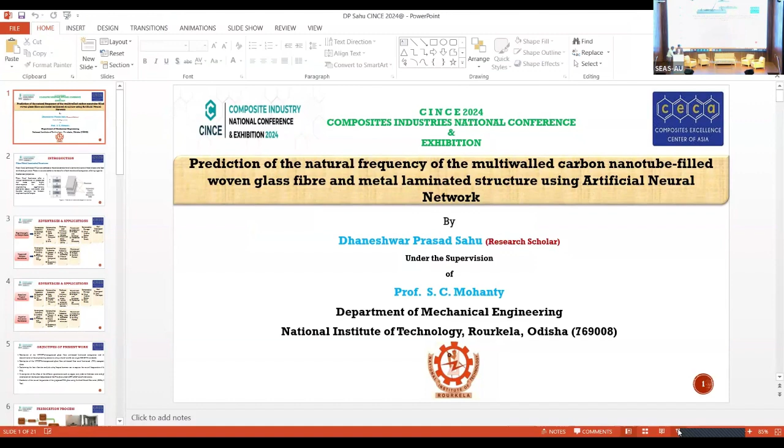Good afternoon to all. First, I thank Professor R.K. Singh sir for giving me the opportunity to deliver my talk on the topic of prediction of natural frequency of multi-walled carbon nanotube-filled woven glass fiber and aluminum-based fiber metal laminated structure using artificial neural network.

Over the last 2 days we have seen many lectures dedicated to either purely fiber-based composite or metal matrix composite. So in this talk, I just cover what happens if we combine the fiber and the metal, and what are the advantages. As a mechanical engineer, we are aware that

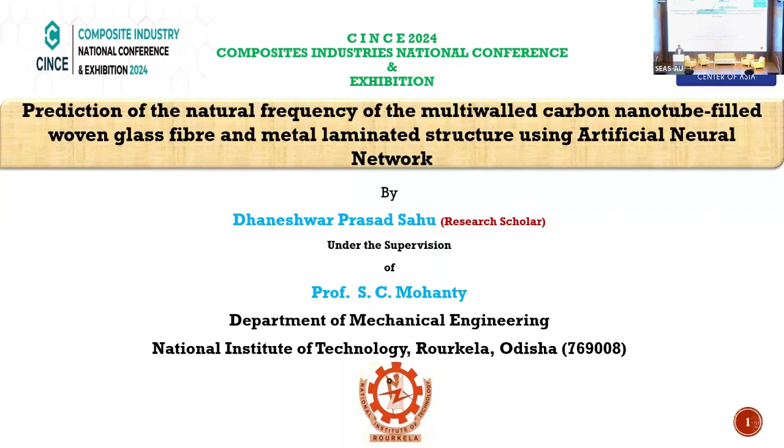vibration is a big enemy for us in structure application. So using fiber metal laminated structure, somehow we minimize the vibration in structure for aerospace application. Fiber metal laminated structure consists of glass fiber and aluminum, arranged in a sequence shown in figure 1: first aluminum layer, then glass fiber, then again aluminum, then aluminum layer, then glass fiber, then again aluminum.

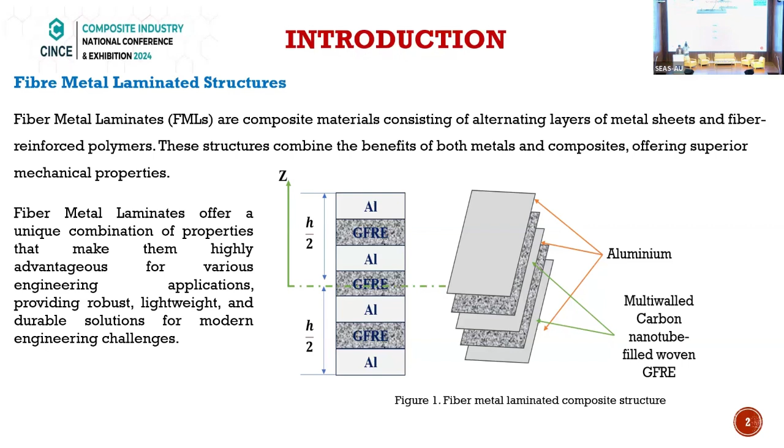These properties are generally used in aerospace, automotive industry, defense and military, construction industry, renewable energy, and rail and transport. Then second property like improved fatigue resistance, these are used as mentioned, and excellent impact resistance, superior corrosion resistance as it is combined with glass fiber, so we can minimize the corrosion.

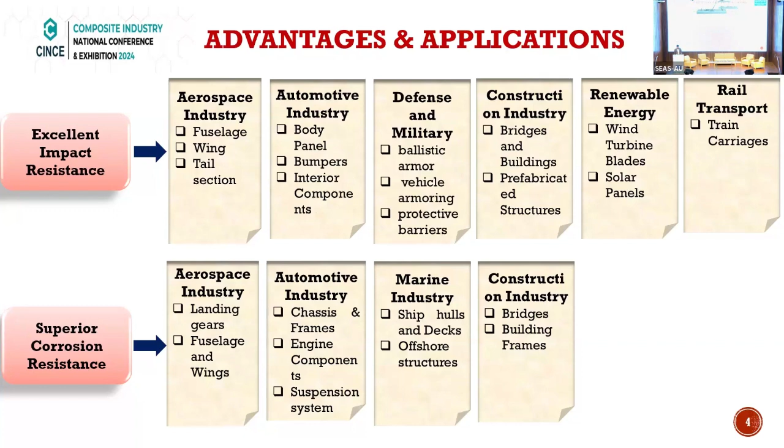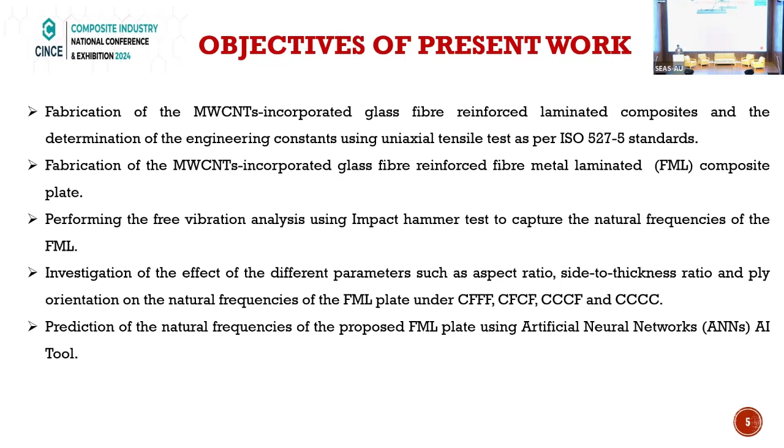The objective of the present work is: first we prepare the multi-walled carbon nanotube-filled glass fiber through hand layup technique. Then we prepare fiber metal laminated structure. Then we perform free vibration analysis using impact modal hammer test to capture their natural frequencies. Then subsequently we study the effect of various parameters like aspect ratio, side to thickness ratio, and fiber angle in laminate sequence of glass fiber, on how these parameters affect the natural frequency. Finally I propose a prediction model to predict the natural frequency using artificial neural network.

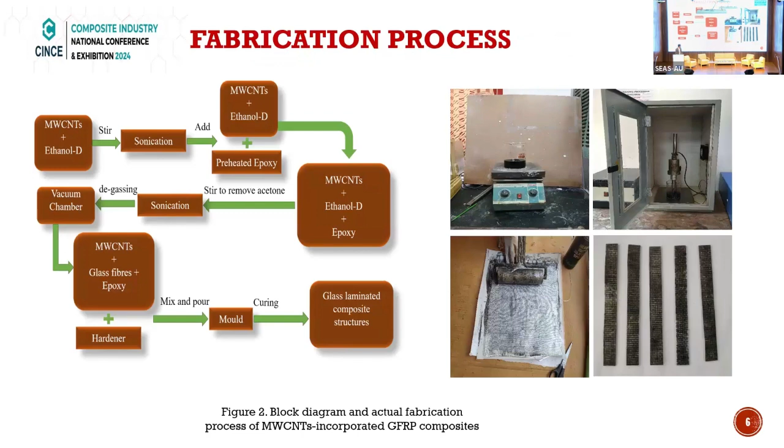These are the fabrication process as shown in figure 2. Left side shows the block diagram, and the right side shows the actual fabrication process. The engineering constants of both aluminum sheet and glass fiber are calculated through uniaxial tensile test, adopting the ASTM ISO standard.

As we know, bidirectional woven fiber has similar elastic constants in both directions, either transverse or longitudinal. To get accurate results and minimize error, I tested 5 samples in the length direction and the 45-degree direction. The 45-degree fiber direction elastic property is required to calculate the shear modulus, which is calculated through Jones formula, as mentioned in Robert M. Jones' Mechanics of Composite Materials book.

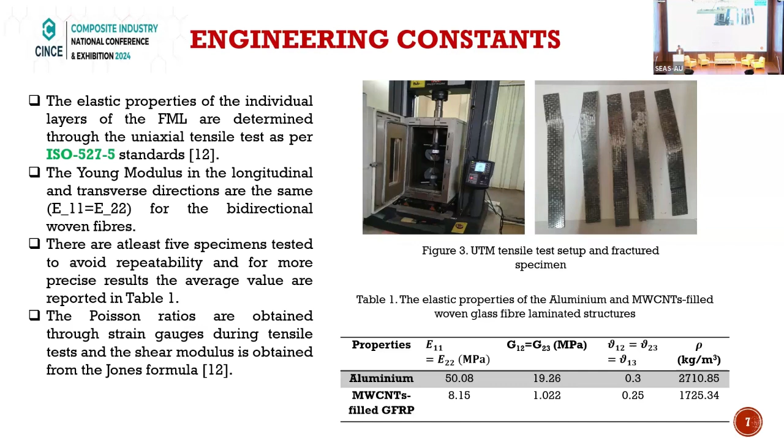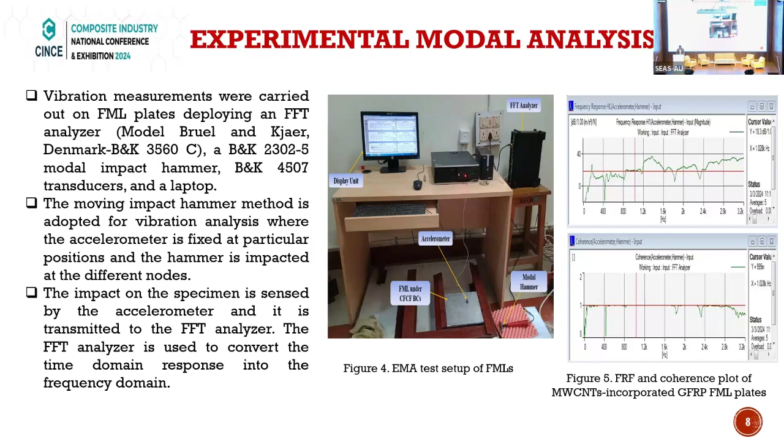We also simulate the natural frequency in Abaqus software. First we create a geometry, then dimension the geometry, then we lay up the geometry and assemble. Then we assign the mesh size, finalized through convergence study and validation study, and then we assign different boundary conditions.

For the present analysis, I have adopted 4 types of boundary conditions: cantilever boundary condition, opposite side fixed and opposite side free boundary condition, 3 side clamped and 1 side free, and all side clamped boundary condition.

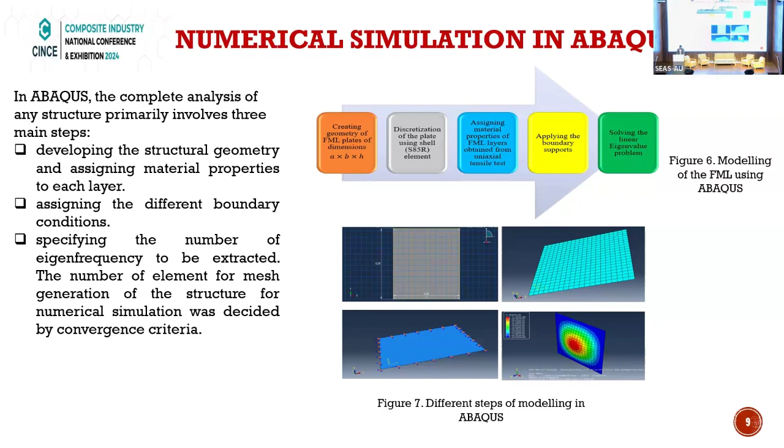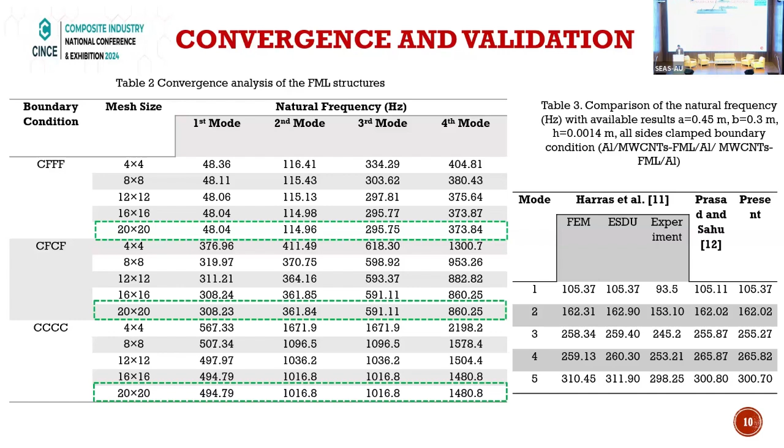Then I performed the parametric study through finite element software. First I investigate the effect of aspect ratio, how aspect ratio affects the natural frequency.

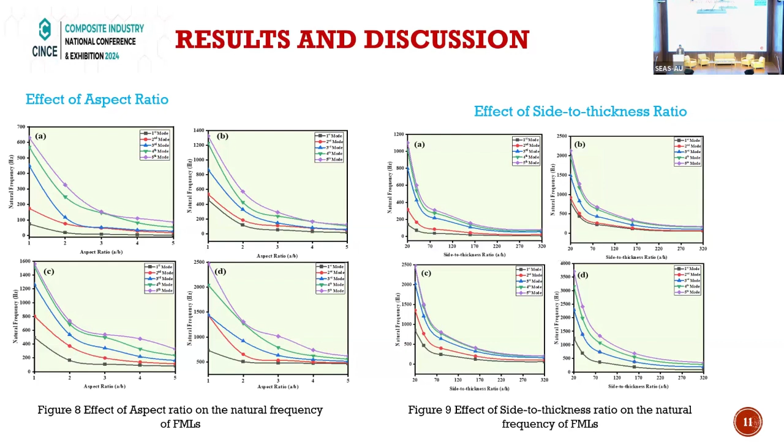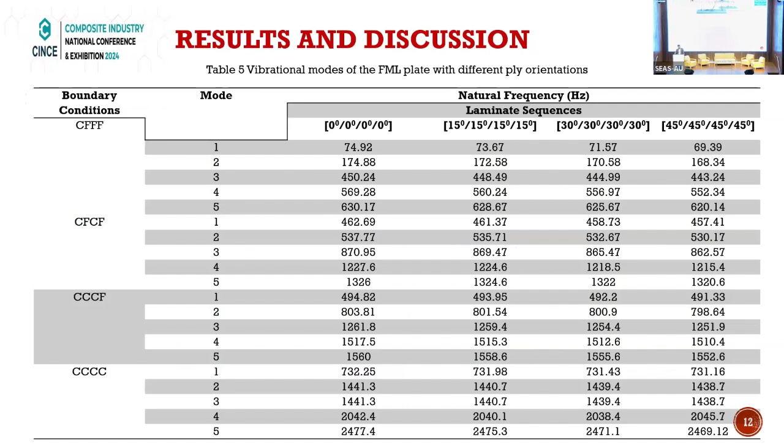The same trend happens for side to thickness ratio, as mentioned in figure 9. Table 5 shows how fiber angle affects the natural frequency, and it is noticed that when we increase the fiber angle, the natural frequency decreases from 0 to 45 degrees.

Then I propose a neural network model. For that, I have taken 3 inputs: aspect ratio, ply orientation, and side to thickness ratio, and my output is the first 2 modes of natural frequency. Aspect ratio is taken from 1 to 5 in intervals of 1, and ply orientation is 0 degree, 15 degree, 30 degree, 45 degree, and 60 degree.

First, we start the process, then we enter the input and output, then we assign the learning algorithm, then we define the activation function, then assign the neurons in the hidden layer. Then we train the network.

We check if the mean value R is greater than 95, then we close up, terminate the process, and finalize. If the mean value R is less than 95, then we again assign neurons in the hidden layer and train the network.

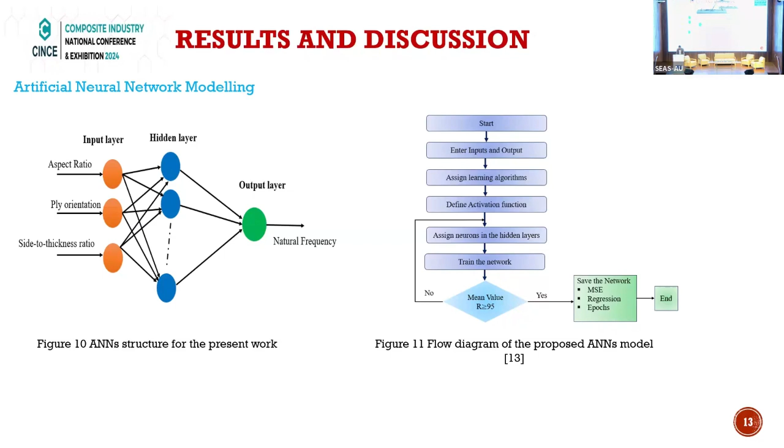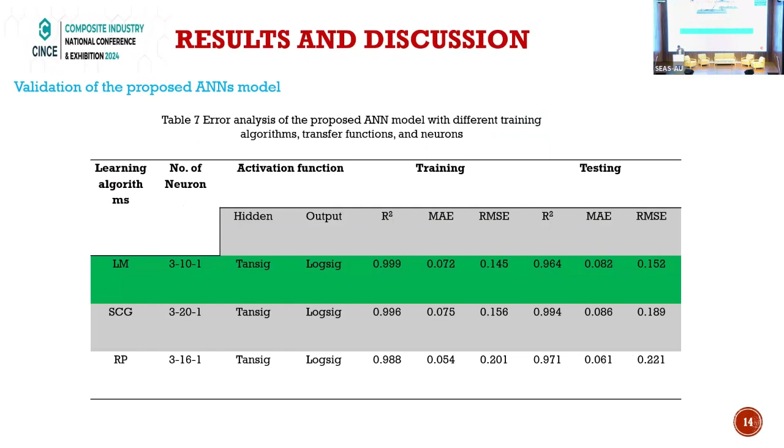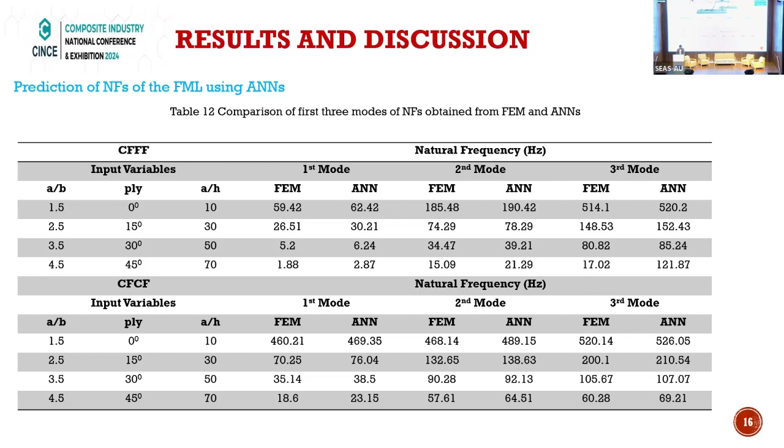The aspect ratio, ply orientation, and side to thickness ratio that are completely new data, and I performed prediction analysis. Subsequently, I fed the same parameters into the finite element software, and I am getting very close results. All these results are within 5%.

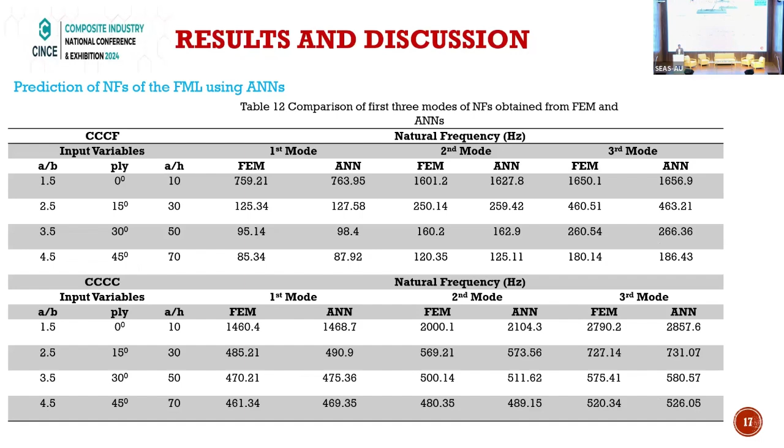Table 12 shows the 3-side clamped boundary condition and all-side clamped boundary condition. So finally, I conclude that for any structure, when we perform modal analysis, the all-side clamped boundary condition has the highest natural frequency compared to others, because when we increase the constraint, the stiffness will increase, which leads to higher natural frequency. Then when we increase the aspect ratio, it decreases the natural frequency.

The same trend follows for side to thickness ratio and ply orientation angle. Additionally, an ANN based prediction model is proposed to predict the first 3 modes of natural frequency, which are then compared with the FEM based software, and the obtained natural frequency from both techniques, finite element method and data-driven artificial neural network, have less than 5% error. Thank you.

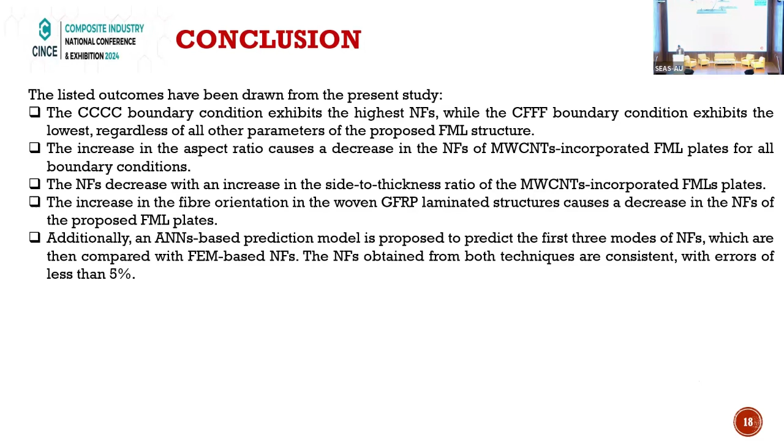Any question? Yes. Yes.

Regarding thermal management, actually to some extent I assume there is perfect bonding. First I prepare the glass fiber, multiwalled carbon nanotube-filled glass fiber, then cure it for 2 days. Then I rub both surfaces, the glass fiber polymer composite surface, through emery paper, and also the aluminum layer. Then in between, I use adhesive Araldite for perfect bonding, as Araldite shows the highest strength for metal, and as per previous research, they are also using Araldite to join the metal layer and the glass fiber layer.

Have you done any study for higher temperature exposure? No, actually my study is basically on dynamic analysis.

You have mentioned that you have used carbon nanotubes in your work, but I feel whenever you are going for the nano level instead of micro level, the dynamics will change. Whatever is applicable at the micro level may not be applicable at the nano level. Have you compared that, or used the same boundary condition? I just followed what previous researchers have done. My main focus is how to improve the natural frequency.